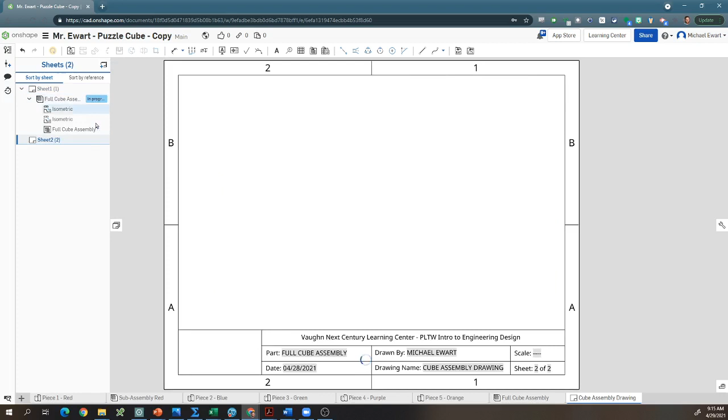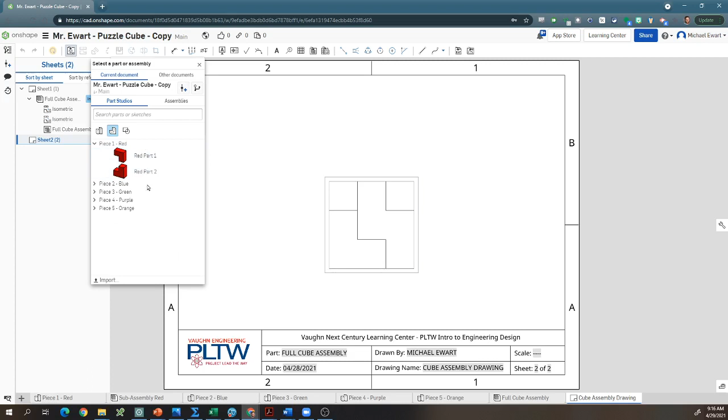For sheet 2, what we're going to do is put in each piece. We'll go to our Insert button and click Insert. Now, before this might have tried to insert the full cube assembly again - just click the Insert button one more time to say you want to insert something else. I want us to insert piece 1. For my piece 1, it was a sub-assembly, so I'm going to do piece 2 and come back to piece 1. So I'm going to insert my piece 2.

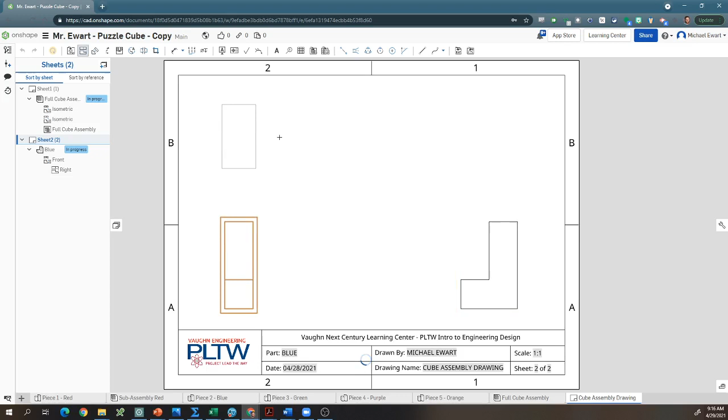My piece 2 is starting off with the front view, so I'm going to put in my front view. Then remember we drag straight across to get our right view. Then I have to click the front view again and drag straight up. Don't go to the side - make sure you go straight up.

Make sure you start with that front view here - don't start with the top view, don't start with the right view, it'll mess everything up. Start with the front view in this bottom left corner. Then I'll click it again, go up to the top, kind of put this in the corner, and there's our isometric view.

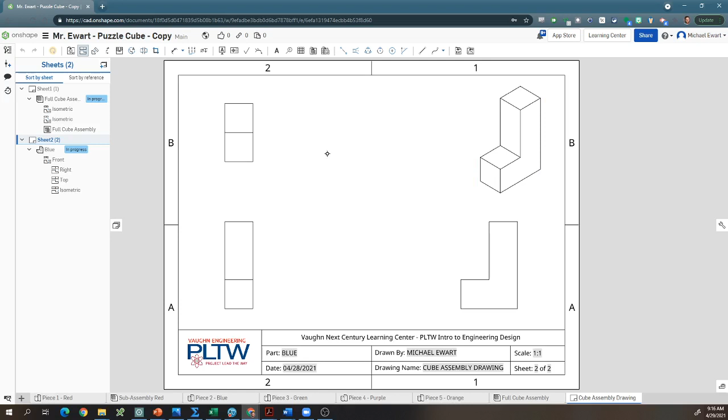So now we need to do a couple things. I need to right click - first hit escape, so you're back to a mouse. Then right click and do show shaded view, that'll color this guy in. Then on all 3 of these, hold down shift, click all 3, right click and show any hidden lines. This one did not have any hidden lines, but we just want to double check and make sure if I do have hidden lines that we get them shown.

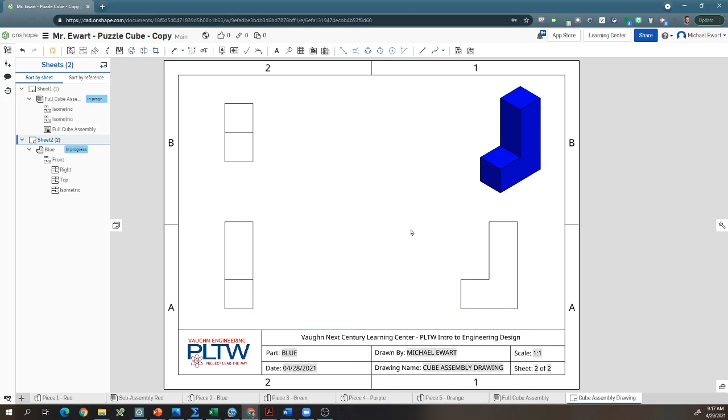Now I'm going to add in my dimensions. Remember it's this tool up here with the 2 arrows, dimension, or you can click the letter D. We want to think from the left side over, right on the front from the left over. So I start on the left - do I hit anything? Nope, so I just go straight across. And we want to make sure this is in the middle, so I have 1 width dimension.

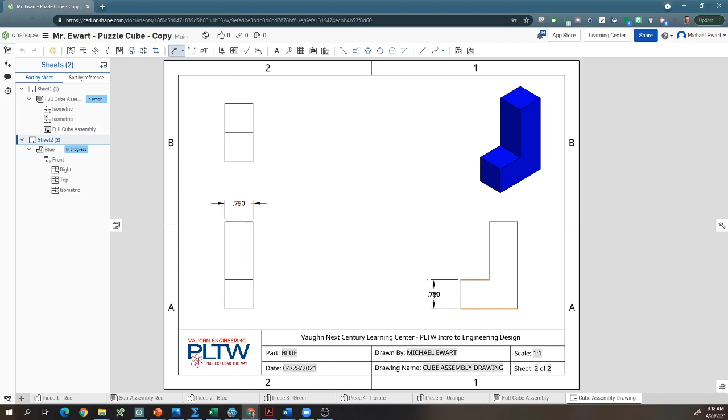Okay, space it out nice - 1 width dimension. Now I'm going to do my heights. Where do I see my heights better, on the front view or on the right view? I feel like the L shape is better for this, so I'm going to use this shape. I'm going to start on the bottom - do I hit anything? Yeah, I hit this part. Always go on the left side, so I'm in between these two, don't go on the right side. So on the left side, I'm going to go out about here. And from the bottom, now I go to the next thing I hit, which is up here - that's 2.250. Don't put it up here, kind of put it in the middle, and just try to space it out nice and even with the next guy.

All right, now I need my depths. I can either do this sideways on the right view, or up and down on the top view. I'd like to do sideways on this view, but the problem is those would cross. So because they're going to cross, I'm going to choose instead to do my depths on this top view. I'll go from the bottom up until it hits, come across, and the bottom up until it hits, come across, put it in the middle. So I have 1 width, 2 depths, and 2 heights.

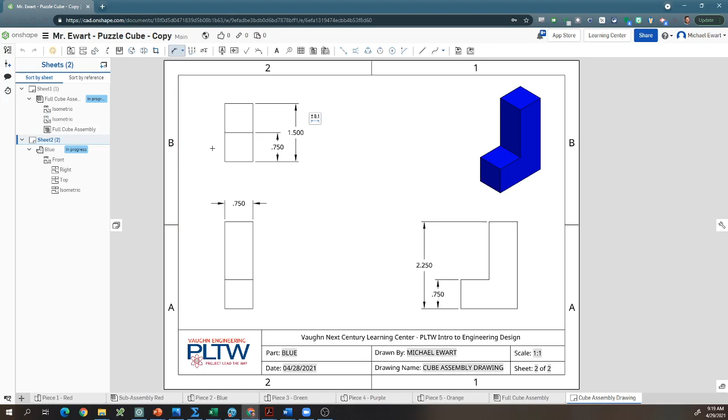All right, and then this is fully finished. Then I would go on to my next piece. So I'm going to hit Sheet again. I will go to Insert again, click Insert another time. And now I'm going to put in my next piece.

I'm going to show, if you do have a piece like this that is split into 2, you should have made it into an assembly. So I'm actually going to choose sub-assembly for my red one.

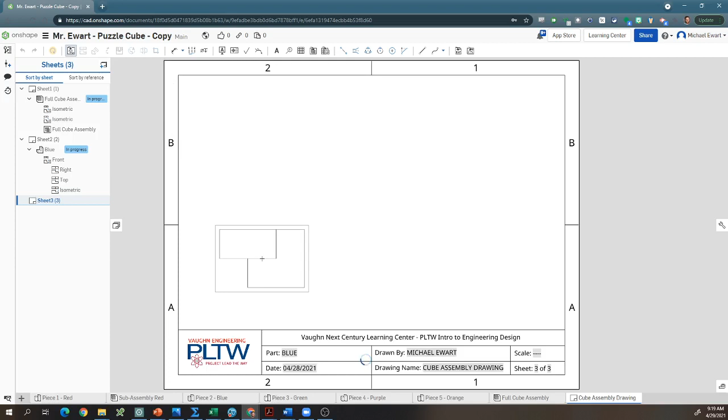And then I'll put in my front view. Then click over to the right view. Then go up to the top view. And click it and go over to our isometric view. Okay, then hit escape, same thing I did before.

Right click this one and show shaded view. And now I'm going to hold down shift for all 3 of these, right click them and show any hidden lines.

So this time I do have some hidden lines. Remember, we are not supposed to dimension any hidden lines. So I'm going to hit dimension again, and I'm going to start.

Now this one's a little bit weird, because if I start on the left side, the first thing I actually hit is this line. And I don't want to go up here, because if I go up here, I'm adding in a line, and I don't want to do that. That's going to make it more confusing. So on this one I do actually want to drag it down below, because of the way my shape is drawn. So most of the time I put these dimensions in between, but because of the way this one's drawn, I would put it below.

The other thing you could do, I guess, is dimension it on that side. Okay, so I have that one.

Next, I'm going to hit dimension again, and I'll go from here. So first I hit this one — like if I was an ant, the first thing that's different is here. The second thing that's different is over here. So now I'm going to go up, and then finally the third one would be the overall. So I have 3 widths. You are never going to have more than 3 on any of this, because the maximum is 3 cubes.

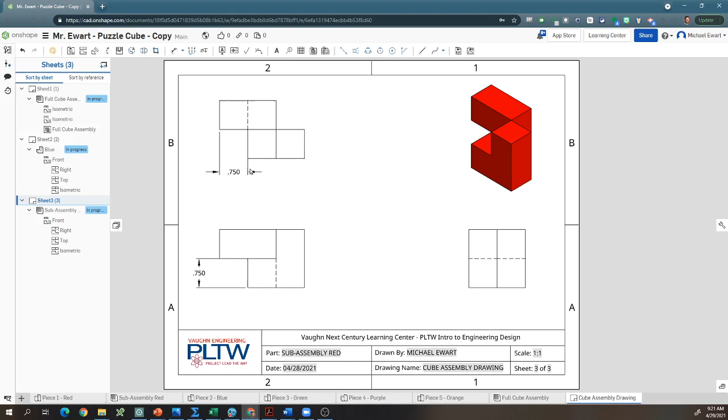Okay, so I did my 0.750 there, and then I did the 1.50 and the 2.25 there. If you really want to, you can put them all on the same one. So I could dimension from this corner here, and then from this guy to the end. Oops.

All right, and then make sure you get it into the middle. It's right there. There it is, locked. So now I have all 3 of mine there.

That's okay as well. So anyways, I put my 0.750 on the left because, again, if I go over here — see how it's kind of passing through the block? I don't want it to pass through the block. So that's why I put it over here. So that was my first height.

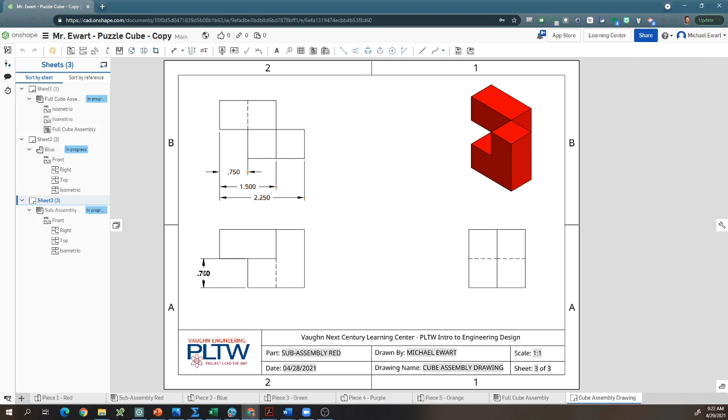Now for my second height, it would be the overall. But I don't want to put this one over here. I want to put it in the middle because now it's in the middle of these two. So it is okay that these are on opposite sides — it just happened because of the way my part was drawn.

Then finally my depths. For my depths, I can either do this guy to this guy, or I can do on the right view, this one to this one. All right, so there's one depth, and then our second depth.

So I have 2 for my depths, 2 for my heights, and then 1, 2, 3 for my widths.

Generally on these, it's going to kind of match up with your block, so it's 1, 2, 3 cubes across going left and right, that's why I had 3 widths. Then it's 1, 2 blocks tall, which is why I had 2 heights. And if I go backwards, like my depth, it's 1, 2 blocks like a backwards extrusion, which is why I had 2 depths.

Now, it doesn't really matter the order that you put these in, but I am going to move sheet 3 up and have that be the second one.

And we can rename these, right? So this first one is called sheet 1, but I'm just going to call it the full cube. Then this second one I'll call, right click, rename, I'll call this red. And then this third one I'll rename it blue. So now it doesn't seem out of order, it's calling it sheet 2 because I moved it up. So this is sheet 2, sheet 3.

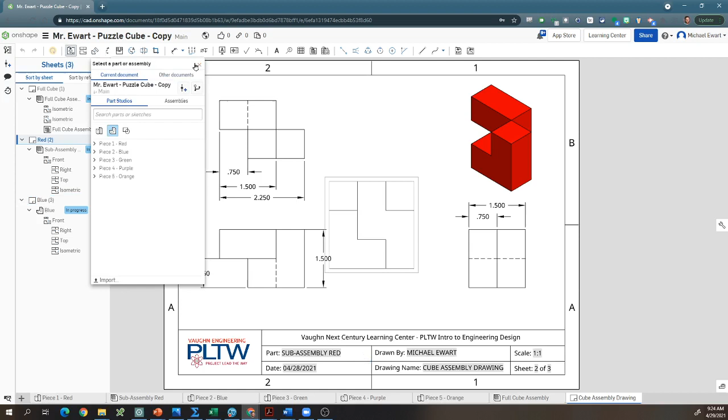We'll just keep going. After that, go back to insert. Oh, I got to make a new sheet, right? So first I have to click the new sheet button. Click on new, click insert, and next I'll do my green piece.

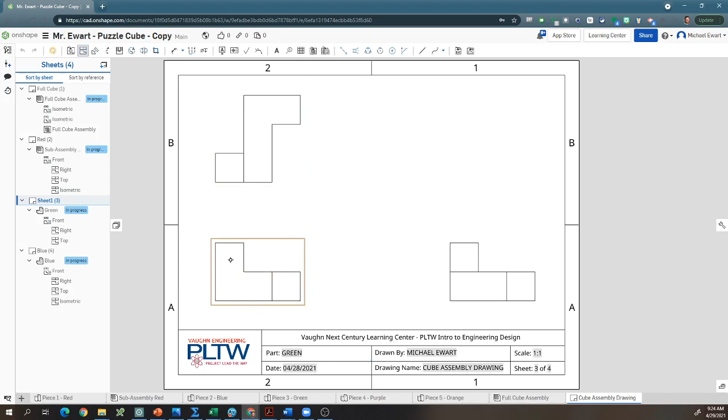So same thing that I've been doing, put in the front first, then come over to the right. I'm not going to do all of these, this will be the last one I do for us. Go up and click on that guy, and then right in the right corner, that isometric view. Then hit escape, we will right click this and show our shaded view.

Hold down shift to pick all 3 of these, right click and show any hidden lines. This one did not have too many hidden lines, but it did have a couple. So hidden lines are saying, hey, if I'm looking from the front, there's nothing back behind this space, that's why there's a hidden line here. There's nothing behind that space.

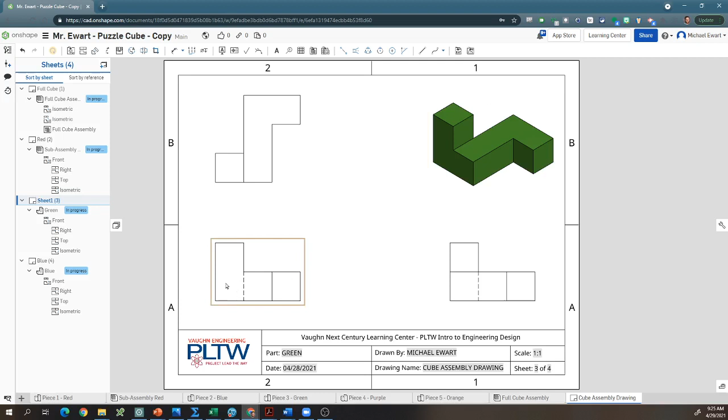So if I'm looking across, there's 1, 2, 3 cubes across, so I'm going to have 3 dimensions there. From here to here, that's 1. From here to here, that's my second cube. And then from here to here, that's my third cube. Just get it locked in the center.

Then for heights, going up and down, I have 2 heights. So there's 1 height and a second height. And kind of going backwards on my extrusion, I have 1, 2, 3 going back, so I should have 3 there.

Now, if I try to do this one, that's going to put it on the wrong side, or I'm going to have to put it over here. So I'm going to dimension this one from this side, so it gives me 1, 2, all right, so that would be finished for that one.

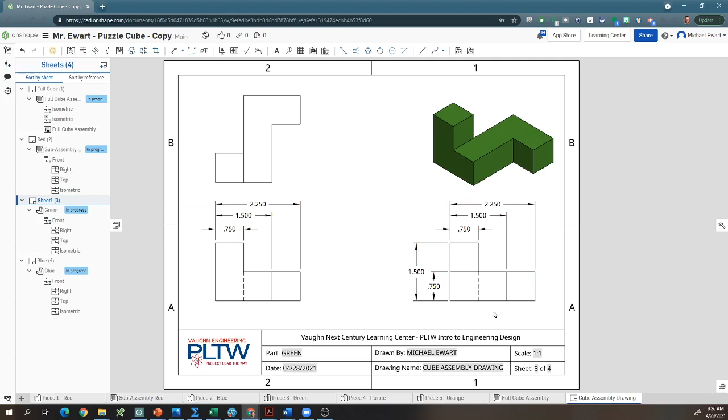And then you'll just add 2 more sheets for your last 2.

The main thing I really need to see is that if this is 1 cube across width, you have 1 width dimension. If it's 1, 2, 3 cubes high, you have 1, 2, 3 height dimensions. If it's 1, 2, 3 cubes deep, you have 1, 2, 3 depth dimensions. So I want to see the proper number of dimensions. Remember you always need your width, height, and depth dimensions, and you'll have either 1, 2, or 3 for each of these.

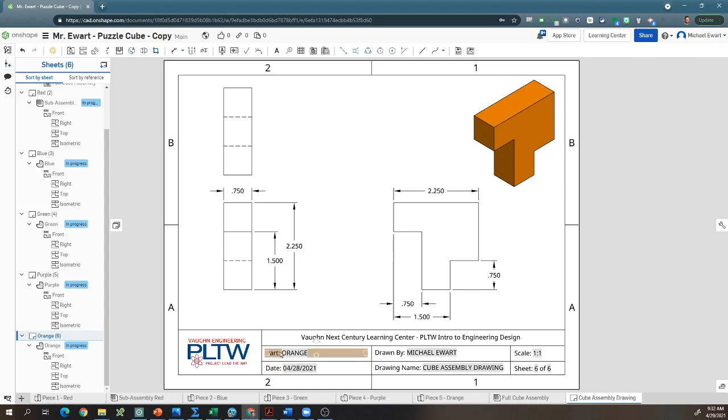And so then this is totally finished. One thing that's kind of cool is that with this template, it'll automatically put in the part name. So this is the orange part, and when we're over here, it's the purple part. They're all part of my cube assembly drawing file that we named down here.

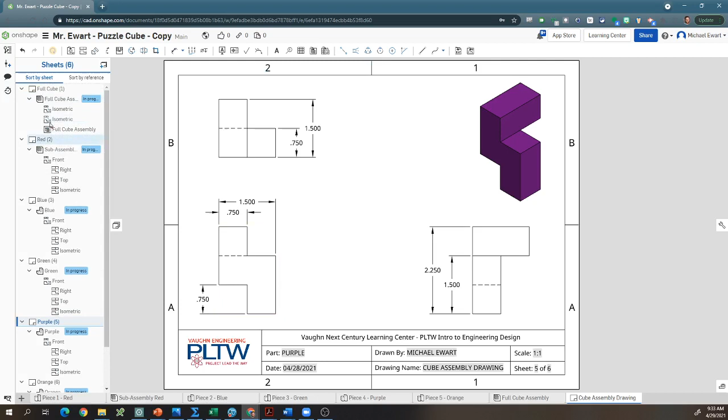Now that we're finished, we're going to do the same thing we did yesterday, where we right click on where it says cube assembly drawing and export this as a PDF. Click on export, and the cool thing is this is actually going to do all 6 pages, all 6 sheets. So when we open this with a PDF application, this will have our first page, but it's 1 of 6, and it will have all 6 of these parts for us.

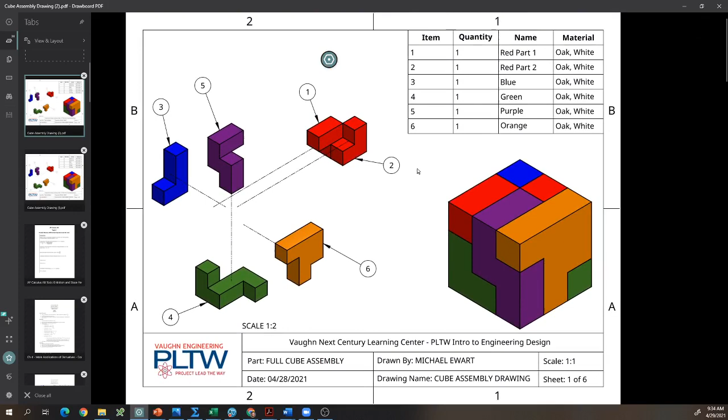And so that's kind of our finalized drawing. This is what you could give a manufacturer if they were going to construct this, 3D print this, or build this. This is what they would want to see - the assembly with all the pieces together, and then a file for each individual piece with dimensions for each piece.

Somewhere on here we probably want to mention that these are all in inches, since we didn't have that. So that might be something we add in as well. We can do that right now before we export - you could export a second time - maybe add a text box somewhere, maybe at the top.

Oh sorry, that's not a text box - this is our text box. So we'll add that note, and we'll just say all units in inches. Cool, so we have all units in inches.

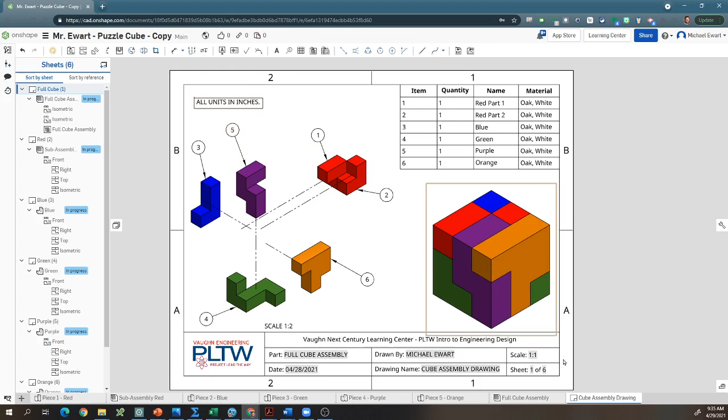I might even box that, if we wanted to put a rectangle around that. So you could use this line tool and just make sure that those lines line up. So you could box that all units in inches, and then now I'll export it one last time.

This way the manufacturer knows what those units are since we didn't specify them. All right, so that's what you're going to turn in. We will have today to do that, and then tomorrow is going to be kind of a catch-up day. So if you're finished with everything, tomorrow you'll have a free day. If you're not finished, then tomorrow you will have to just work on catching up on whatever you need to catch up on.